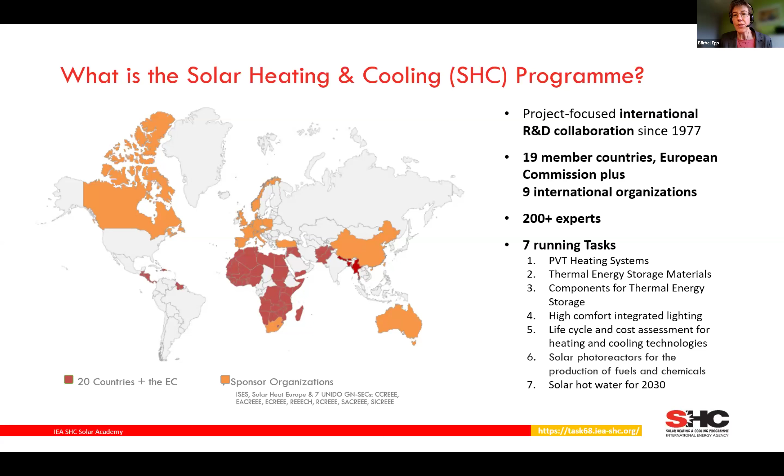There are more than 200 researchers, mainly, but also industry representatives, who join to work on different tasks - this is how we call the research platforms. They are active in different topics. Currently we have one on PVT heating systems, thermal energy storage materials and components, a lighting task, life cycle and cost assessment for heating and cooling technologies, a new one on solar photoreactors for the production of fuels and chemicals, and the one spending time with us today on solar hot water for 2030.

What is the Solar Academy? It's generally a platform which shares the findings and results from research work, but it's not only reports that we publish - we also have training materials, case studies, fact sheets, databases, and tools, which are among the deliverables of the different research platforms.

We have these webinars regularly with ISES. We have the one today, and another one planned for December 2025. They're always held on Tuesday afternoon and Thursday morning, so different regions of the world can participate. Previous webinars with their recordings and presentations are available for download under this link on our website. I want to stress that we also offer on-site training.

This must be on the request of an IEA SHC member country organization, and the previous ones were in China, Cape Verde, West Africa, United Kingdom, and South Africa.

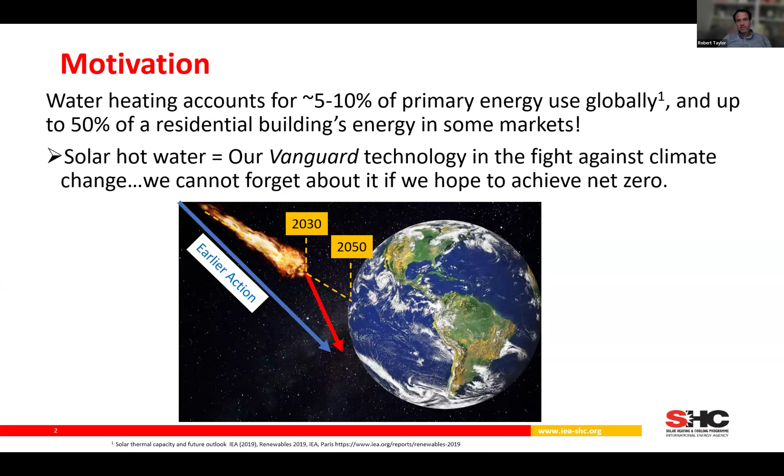As we've gone along in the task, we've realized that solar hot water has a lot of interesting applications, particularly when you start thinking about using photovoltaics to make hot water. There are interesting interactions with other things—whenever you get really high levels of photovoltaics on the grid, hot water is an interesting opportunity for storing excess PV electricity during the middle of the day and making sure it gets used rather than curtailed and turned off.

Another part of the motivation, and the reason we picked 2030 as the target deadline, is that it's pretty near term. There was an IEA report that said if we want to get to net zero by 2050, we need something like 400 million dwellings around the world with solar thermal on the rooftop. Business as usual, unfortunately, for solar thermal technologies is starting to slow down a bit. So we thought now could be a good time to have a task—this was a couple years ago—to try to fill that gap and re-accelerate solar thermal and solar PV for hot water technologies.

At the same time, there are a lot of national and international targets that had something around 2030.

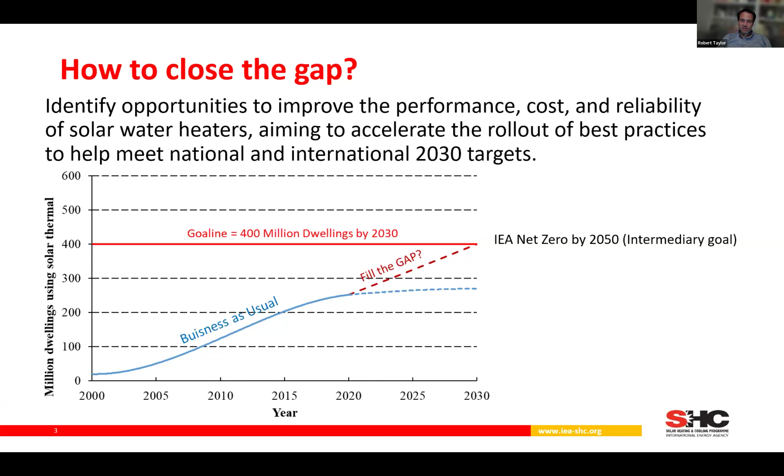So that's how we got going on this task. And basically the task focuses on two technologies. Of course, there's a few other options, but two technologies which we thought, and I still think, are quite viable for now and into the future.

One is thermosyphons, where you don't need any pumps. So you rely on the sun warming the water to kind of pump the liquid. Basically, you get the density change of warming up water, which circulates the water through the system. And right now, that's basically the dominant type of solar hot water technology in the world. Somewhere greater than 50% of systems are thermosyphons.

And also PV hot water systems, which I'm sure we'll discuss in one of the talks later, come in all shapes and sizes, but are growing very fast. An interesting thing about PV hot water is it used to be a ridiculous idea to take your $100 a watt photovoltaic system and turn it into something as simple as hot water. But now that PV is getting so cheap, in a lot of places you can install a system for much, much less than $1 per watt. It's starting to make a little bit of sense.

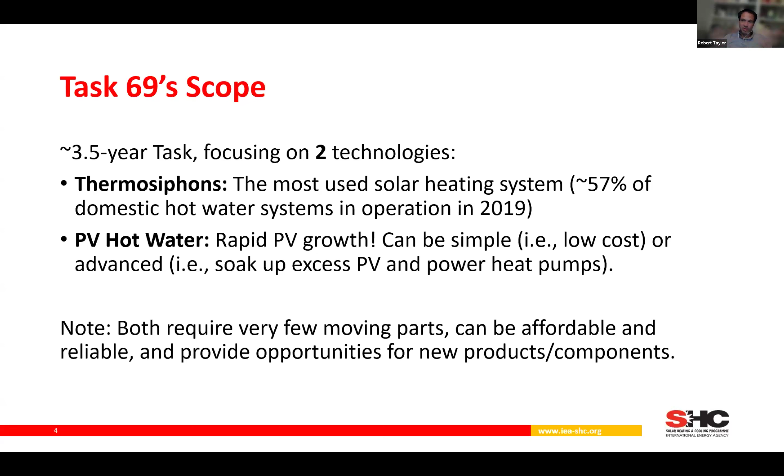And if you pair it with a heat pump or something, you can get back to similar efficiency as a thermosyphon. So both of these technologies were of big interest to us, and they have some similarities in that they don't require a lot of moving parts. They can now both be pretty affordable and reliable, and there's some interesting opportunities that might interest manufacturers to try to get some new products, components, smart systems, things like that, which I think will be discussed later as well a little bit.

And then whenever you think about where these kind of solar systems are being installed, well, we've seen a little bit of a decline in the market in China, which used to be definitely the leader. But there's still quite a bit of growth for solar hot water in sub-Saharan Africa and in other parts of Asia. People are always going to need hot water. Anyone that's tried to take a cold shower will very much appreciate having some hot water in your house. But in terms of solar technology installation, there's a few key growth areas out there, and a few of the historic ones are slowing down a bit.

In some of the other markets around the world, I'm not sure where everyone is joining from, pump systems can be more popular. And that works well, of course, if you have a reliable grid where you can use electricity for pumping the water. But places where maybe there isn't such a reliable grid or where there's a lot of rural areas, thermosyphons are a good solution.

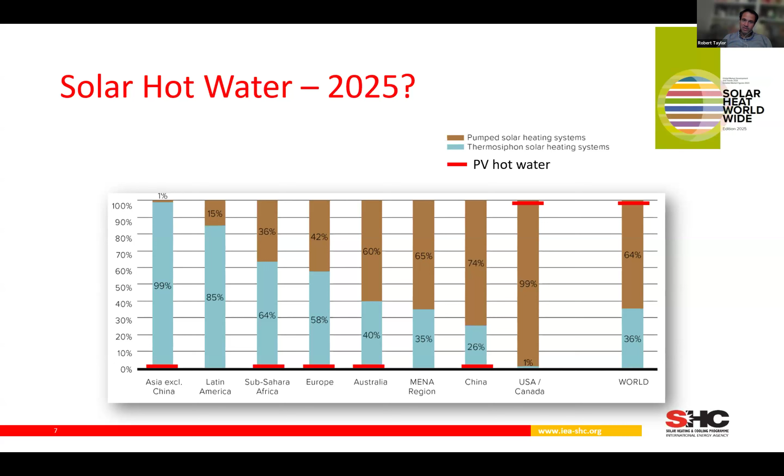And also in places where there's a lot of PV on the grid already, like where I'm coming from here in Australia, there's places where the electricity price can go negative because we have too much PV in the summertime during the middle of the day. And you can actually get paid to take electricity off the grid because there's so much solar. And so those parts of the world are starting to see some growth. Right now, it's very small, it's little bars there, but I think that's a technology that's going to grow a lot in the next few years.

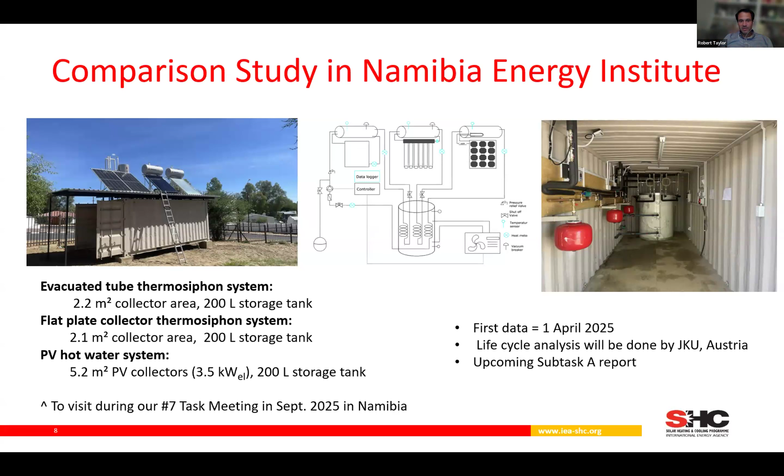So just a few other little points that were in the task that I think are worth discussing. One of the things that's ongoing, and we just recently got some live data from, is a comparison study at the Namibia Energy Institute where they're looking at a PV hot water system, a flat plate thermosyphon system, and an evacuated tube thermosyphon system, all in the same location, all with similar energy outputs, same storage tank size, and they're just now getting some live data from that. So it's kind of a nice experimental study that I was actually on the ground visiting last month in Namibia.

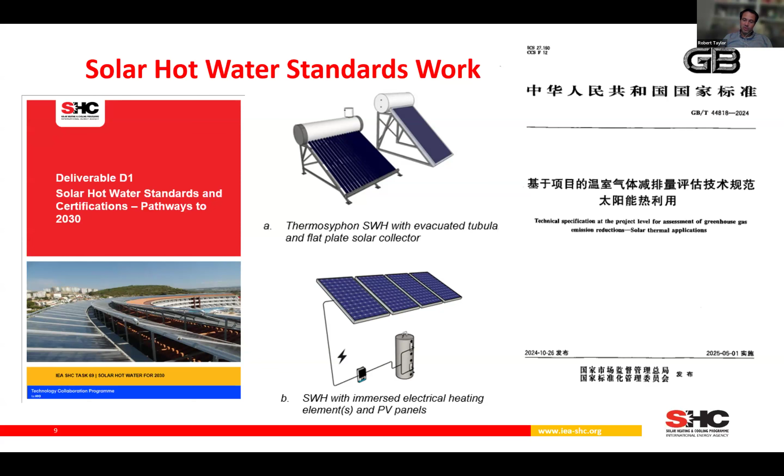We also had a bit of work on standards inside the task. So there was a new Chinese standard, which you can see there, and we had a report on different standards and certifications from around the world, which is published on the task website if anybody's interested. But there's quite a few configurations and quite a few standards around the world, and they don't always capture everything, and they don't always line up. So there's some recommendations in that report about harmonizing standards and certifications.

Also in the task, we've done a little bit of training sessions and looked at some of the needs for training. So we had some in-person trainings, and of course this Solar Academy sort of counts as a bit of training. And we had a training session in China, and we had a training session just recently on that visit to Namibia. In terms of what is needed for training, at both of those places we asked participants what they want to see more of in terms of training.

And overall, I learned a lot during this task. We have a few more months to go to get our final deliverables. But one thing that I've found to be interesting is that it really brought together a lot of people from a lot of different cultures, perspectives, different climates, different kinds of markets. And solar hot water, I think, has a role to play, maybe different technologies, different configurations, but all around the world. There's a demand for it and a way that it can be made to work, I think, economically and technically all over the world. And of course, running this task, I had opportunities to visit experts all over the world, and we had some really nice meetings all around the world.

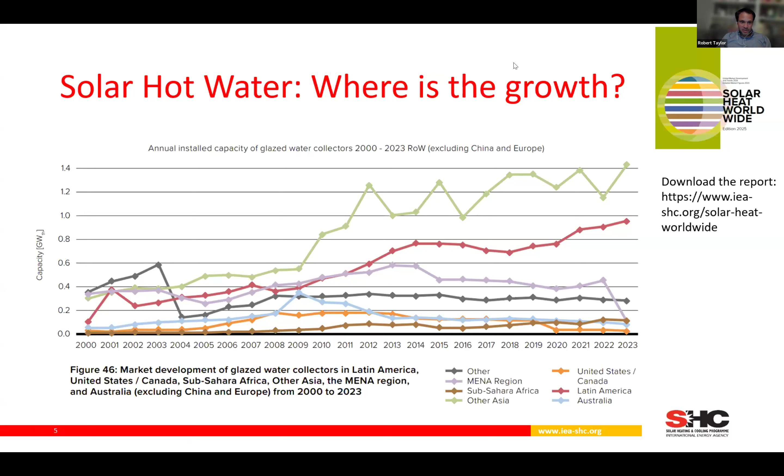Let me see. That's it, I hope. Yes. We go to the next slide. Yes.

So we have Dr. Bojia Li with us. He's also professor at the Solar Energy Application Center for the China Academy of Building Research. His research mainly focuses on solar thermal application and energy efficiency technologies in buildings. He holds a PhD in HVAC from Tianjin University, and he is contributing to the national key R&D program called Key Technologies and Demonstration on Zero Carbon Building in Solar Energy Rich Regions. He has a long title for his presentation today: greenhouse gas emission reduction testing in China for thermosyphon systems. So, Bojia, the floor is yours, and I'm looking forward to your presentation.

Thank you. And I will share my slides. Okay. Yes. So maybe there are some small mistakes.

My presentation title is greenhouse gas emission reduction testing for thermosyphon systems in China. I'm Li Bojia from the China Academy of Building Research. I joined the IEA SHC Task 69, and I'm the subtask leader of subtask B for thermosyphon systems. Today, I want to share one of the important outputs from subtask B, about emission reduction testing for thermosyphon systems in China.

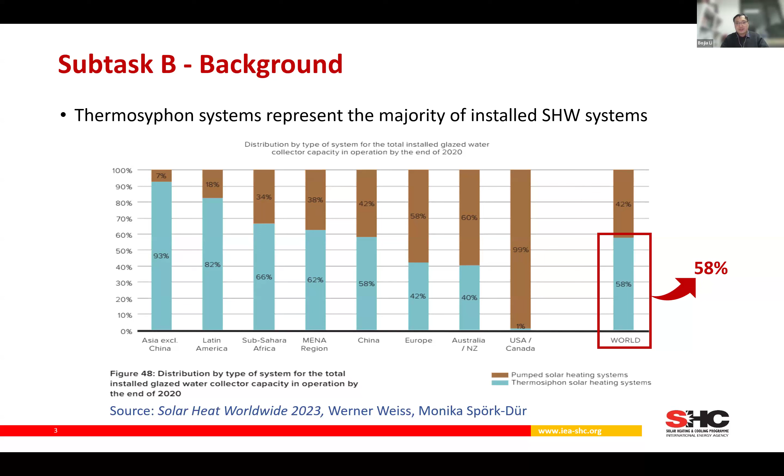There are 4 main parts of my presentation. First, subtask B is mainly focused on thermosyphon systems. Although the thermosyphon market has dropped in most markets in the whole world, they still represent the majority of installed solar hot water systems. Through this subtask, we want to promote thermosyphon systems by 3 methods. First is to investigate new systems improving convenience and performance to get better design or management technologies.

Until now, we gathered a lot of interesting innovations on thermosyphon systems, such as smart control systems, cloud maintenance systems, and new materials, all gathered in our deliverable B1. The second goal is to investigate failure modes and effects in different regions, mainly in African countries, to find ways to improve durability and reliability. The main failure modes and effects were already presented in the last Solar Academy.

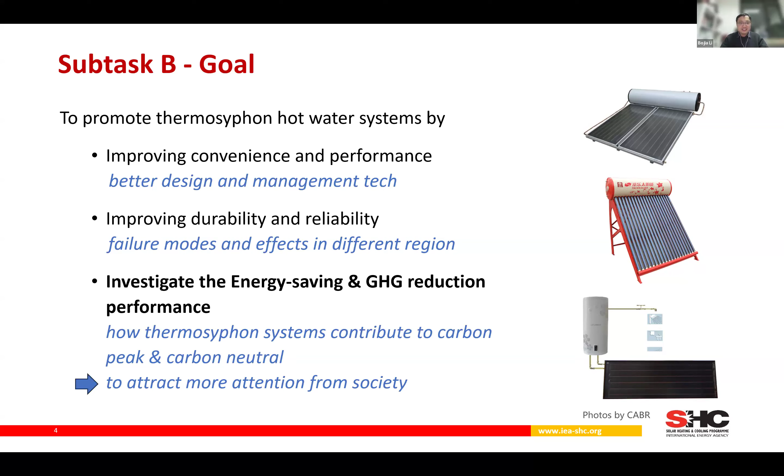So today I want to share the third one, which is to investigate the energy saving and emission reduction performance of thermosyphon systems. We want to tell the public how thermosyphon systems contribute to the carbon peak and carbon neutral goal, and attract more attention from society to show we are making a big contribution to carbon emission reduction. That's our initial motivation for this part of research.

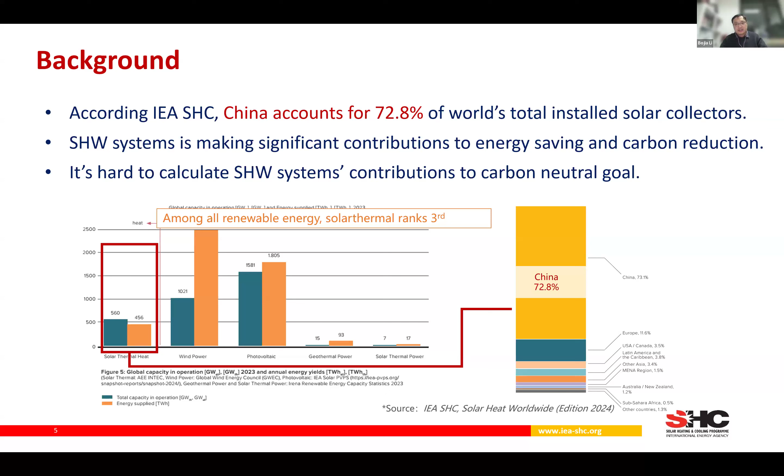The background is China accounts for about 73% of the world's total installed solar collectors, and solar hot water systems are making a significant contribution to energy saving and carbon reduction in China. But it's very hard to calculate their contribution to the carbon neutral goal, because China lacks an emission reduction assessment method for solar hot water systems. There are China's own certified emission reduction methods, but only 4 methods published.

One is about solar thermal power generation. Others are about carbon sinks for forests, grid-connected offshore wind power generation, and mangrove forest construction. None of them are relevant to solar hot water systems. For international methods, there is the Clean Development Mechanism, mainly developed by the United Nations, with one method for solar water heating systems including 3 ways: system simulation, system metering, and stipulated energy saving. They give a constant annual solar yield of about 450 kilowatt hours per square meter of collectors.

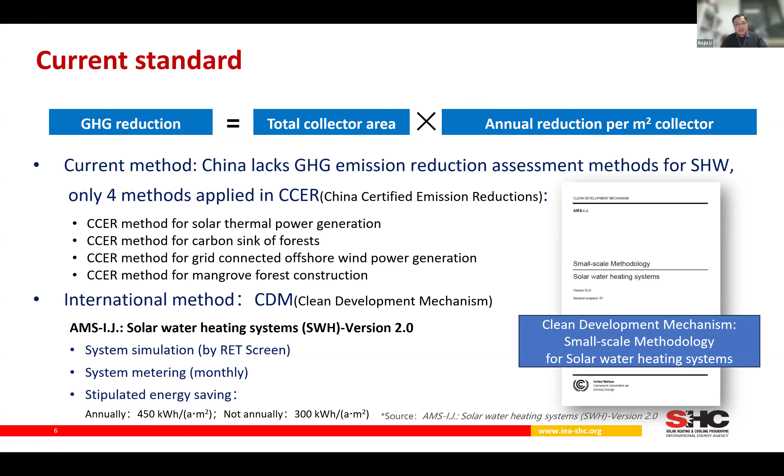We think this method is also not quite suitable for the Chinese situation, because there are a lot of differences between China and Europe and the US in hot water systems, and that may cause differences in emission reduction. For example, China has a lot of different cities.

They have a lot of very different solar resources. For example, in Beijing, the annual solar irradiation is about 1,000 to 1,500 kilowatt hours per square meter. But in Tibet, there may be more than 2,000 or even 3,000 kilowatt hours per square meter of solar irradiation. So the solar resource is very different in different places. That means you will get very different emission reduction with the same solar thermosyphon systems.

Another is the system type. In China, this compact system takes the majority of the thermosyphon systems. It uses evacuated tubes and a water tank, integrated together to provide hot water. And the hot water demand is very different because there are a lot of high-rise apartment buildings in China, and the government used to force buildings to install solar hot water systems. So you can see a lot of this type, the flat plate balcony system, installed in high-rise apartment buildings. Therefore, we think other countries' experience maybe is not quite suitable for emission reduction in China.

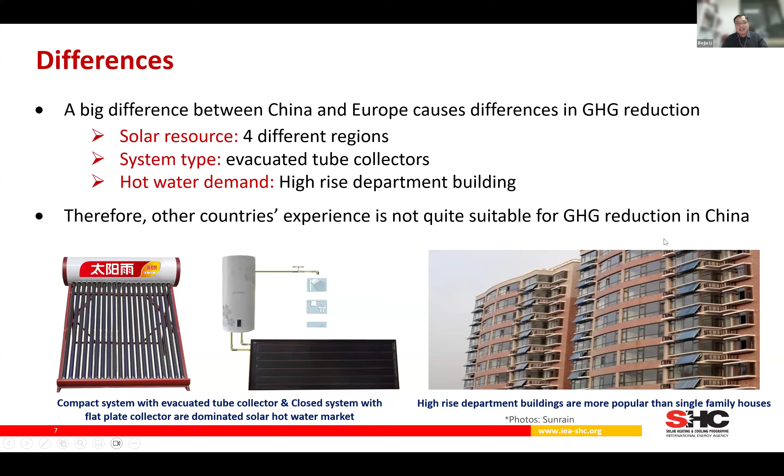So we started our research, and we want to build a method to assess the carbon emission reduction for solar hot water systems and tell the public how much carbon emission reduction the solar hot water system could provide for society. To ensure the reliability of the method, the research includes four parts. First, we generate a main procedure to evaluate the emission reduction performance for solar hot water systems.

We already know ISO 9459 Part 2 gives the testing method and long-term calculation methods for solar hot water systems' solar yield. For example, we can calculate how much solar yield one solar thermosyphon system could get through one year. Then we could convert that into carbon reduction with a carbon factor. I will talk about it later.

And then we make long-term modeling. We model annual energy saving and carbon reduction by daily calculation. This modeling procedure mainly follows the way used in ISO 9459 Part 2, but we make a little adjustment to make it suitable for the compact system I just mentioned, the most popular system in China. And then we did long-term testing to verify the model with operation data.

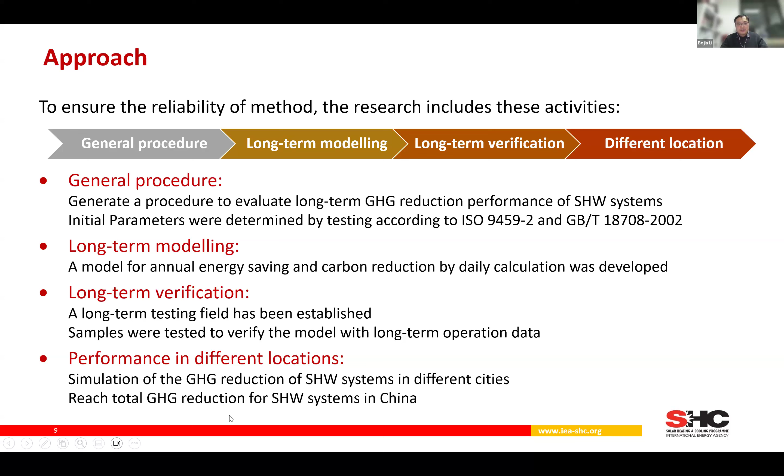And then we do simulations for solar hot water systems in different cities in China, because China has a lot of different cities with quite different solar resources. And then we reach the total emission reduction for solar hot water systems in China. The general procedure is mainly three steps.

First, individual samples of solar thermosyphon systems should be tested in the laboratory according to ISO 9459 Part 2 and the Chinese national standard 18708, to get the main characteristics of the system, mainly the solar yield, heat losses and the drain water temperature curve. There is a little difference, as I just said, for the compact system in China.

It's an open loop system. So when you drain out the water from the tank, the temperature remains the same, as no cold water will be added. And so you could only drain out about one times the tank volume of water during this step. So we took these two standards. This is for the compact systems. This is for other types of system.

And then we calculate annual energy output and saving with the software, because we must get the annual energy output through daily calculation. We calculate every day's solar yield and every day's heat losses, and we give a daily water use curve to simulate the water usage. The method is very similar to ISO 9459 Part 2, but you have to calculate 365 times a year. So we developed a small software to make it easier.

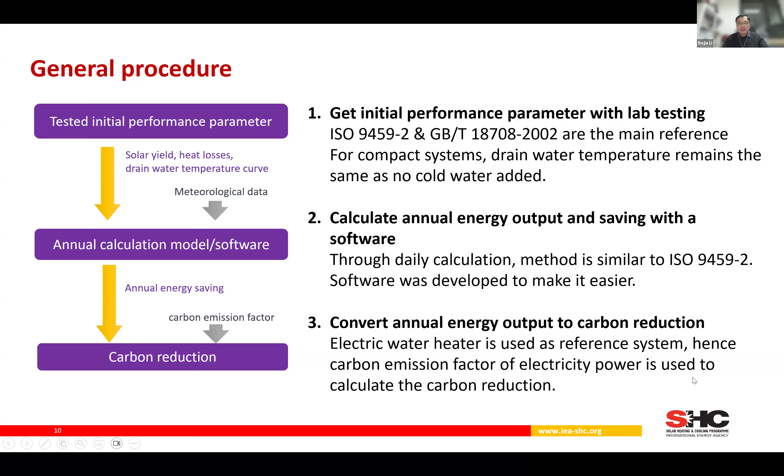And then when you get the annual energy saving, annual solar yield, you could convert annual energy output to carbon reduction. At this stage in the research we use an electric water heater and a gas boiler as reference systems. But for the testing we use an electric water heater as the reference system, and then the carbon emission factor of electric power is used to calculate the carbon reduction. I will talk about it later in detail.

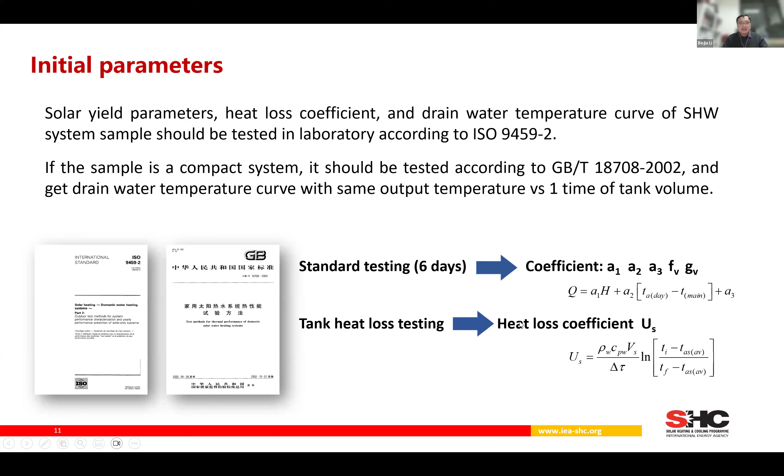For the initial parameters, as I just said, these key parameters could be tested in the laboratory according to ISO 9459 and the Chinese national standard 18708. And then you can get these characteristics and input them into our testing model. We made a small calculation software, and you input that.

The software will calculate the whole annual solar yield and carbon reduction automatically. This is the main calculation procedure. I think it depends on the time. I don't have enough time to introduce in detail, but maybe you could look at that later.

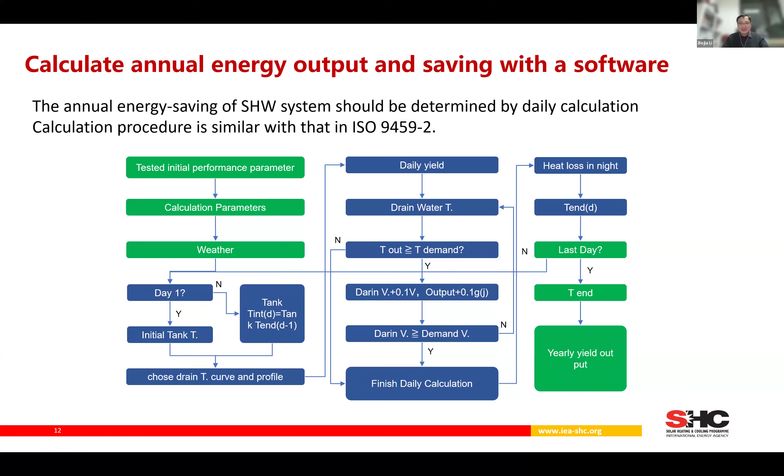And for the convert to carbon reduction stage, as I just told, the emission reduction of solar hot water systems could be calculated with the following equation. It's generally about the baseline emission and the project emission, and if you have the testing or calculation solar yield per year, you could multiply by the baseline carbon factor and then divide by the baseline efficiency. The efficiency means the electric water heater or gas boiler,

the energy efficiency. According to Chinese national standards, the energy efficiency for an electric water heater must be no less than 0.95, and for the gas-fired boiler must be no less than 0.86. And for the carbon factor for electricity, we usually use 0.5 kilogram carbon dioxide per kilowatt hour. Our government announces the electricity carbon factor every year, and we could see last year is about 0.56, and the year before last year is about 0.58, and now it's declining every year.

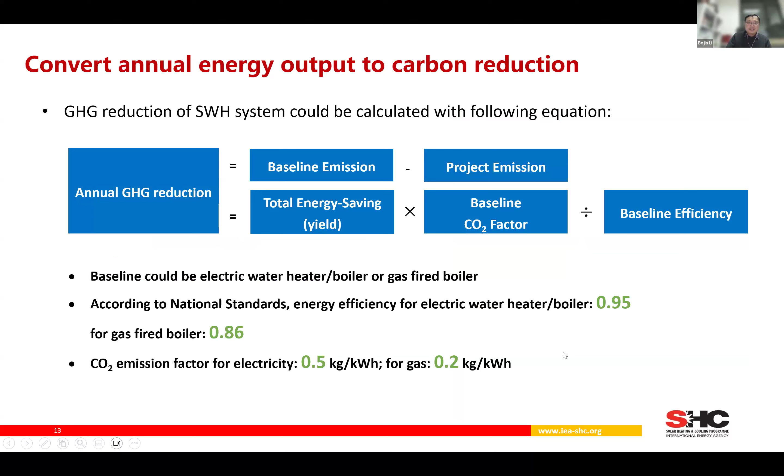We did a prediction for the future 5 years carbon factor, and the average one is about 0.5 kilogram carbon dioxide per kilowatt hour. Usually we use this figure to calculate the carbon emission in the Chinese national standard. And for the gas, maybe this is more fixed, and it's about 0.2 kilogram carbon dioxide per kilowatt hour heat. Okay, that's all the assessment method part.

And then to verify the calculation model and the calculation procedure, we built a carbon reduction testing field in Jiangsu province with the help of Solareast company. And this is also a part of the output from our subtask B. And this is a view of the testing field. There are 25 types of thermal systems installed for long-term testing, including the solar hot water systems, and also PV water heaters, PVT systems and some heat pump systems. But we only use the solar hot water systems for verification.

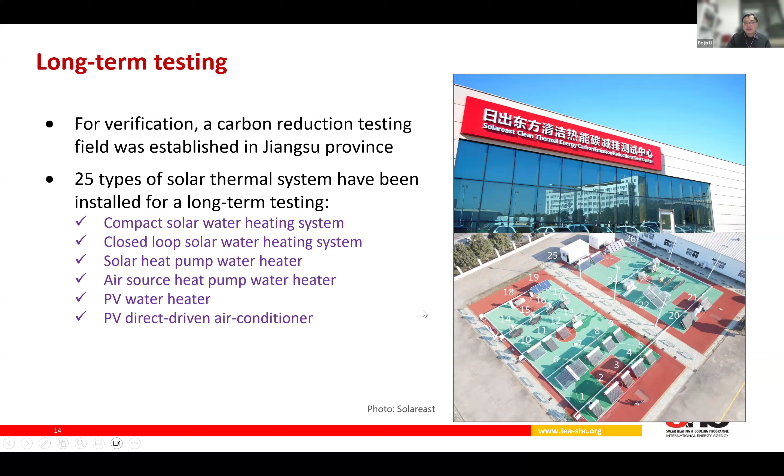We mainly use these two kinds of system. One is the compact system or open loop system, which is the most popular system in China. 10 samples have been tested, and the average daily energy saving is about 2 to 4.7 million joules per square meter. And the average daily emission reduction is about 0.33 to 0.75.

And this type is the most popular system in Chinese high-rise apartment buildings, the balcony system. This type of system is a pressured system and a closed loop system. This is a tank. This is a plate collector. Usually this will be installed outside the balcony, with a pipe between the tank and the collector connecting them to transfer the heating fluid.

And about five systems have been tested, and the average daily energy saving is about 0.8 to 2.3, and the emission reduction is about 0.14 to 0.5. You could see the pressured system or balcony system is less than the compact system. That is because it is mainly designed for balconies of high-rise buildings, and the slope of the collector is not quite as good as the compact system.

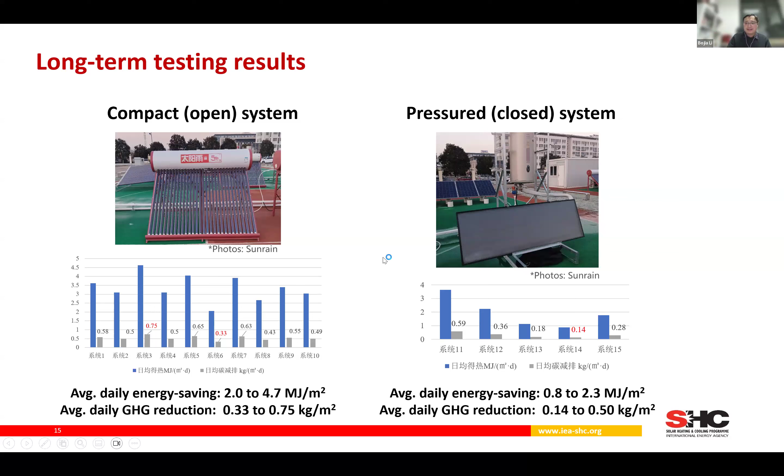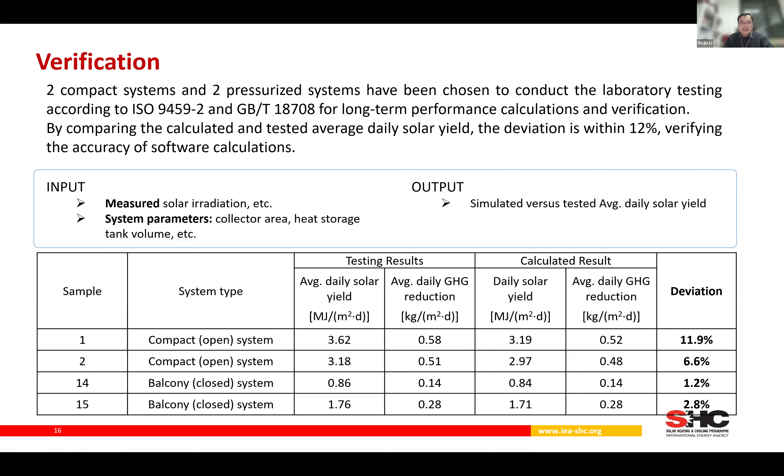And then for the verification, we input measured solar irradiation weather data and system parameters to the software we developed, and we compared the calculated solar yield and the tested solar yield, and we could see the deviation is within 12%. We think our method is accurate enough to evaluate individual thermosyphon systems' emission reduction.

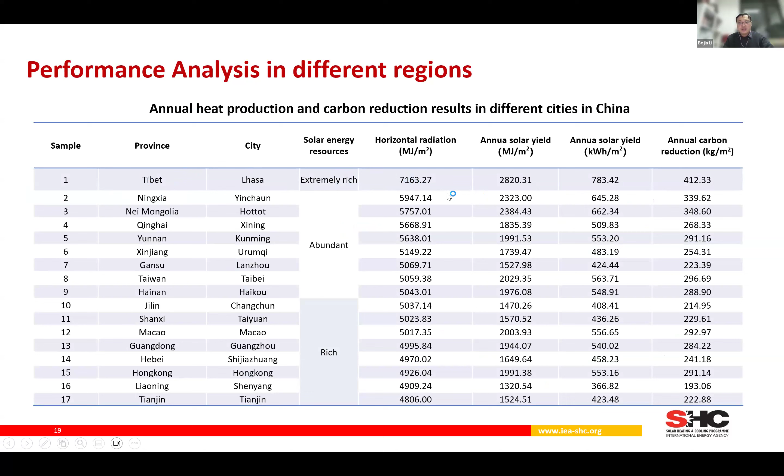The extremely rich resources are more than 7,000 million joules per square meter per year. And the worst solar energy resource is Chongqing. They have only about 3,000 million joules per square meter per year, and it's half of Lhasa in Tibet.

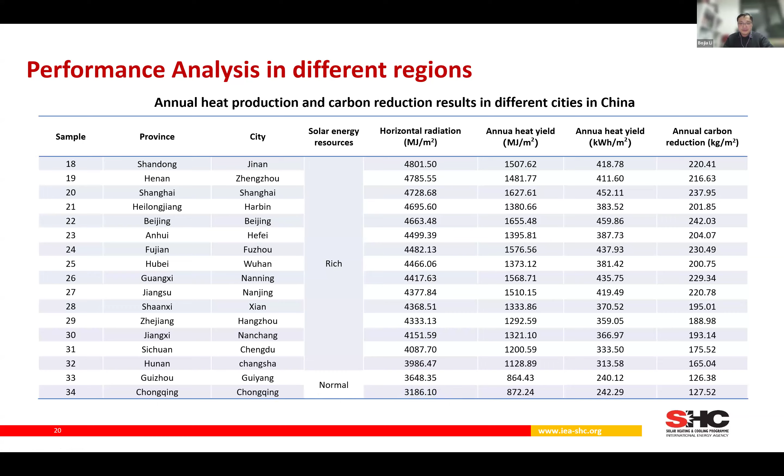And when we get the solar yield and emission reduction for each city or each region, we think this city could, on behalf of this province, and to get an average figure for the whole country, we use this figure weighted according to the population of each province. That is, we think in China almost every family has

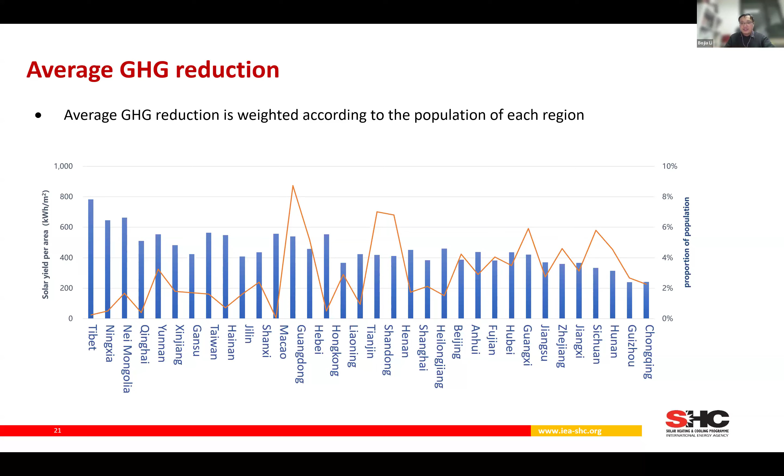thermosyphon systems, so maybe the city with more people will have more thermosyphon systems. That will reflect how many systems have been installed, and then we get the final figure: the average solar yield for thermosyphon systems in China is about

420 kilowatt hours per square meter, maybe less than the figure in the CDM method. And the average emission reduction is about 97 to 220, because this figure differs depending on whether it's compared with a gas boiler or with electricity as the reference system, because in China electricity has a larger carbon factor compared with gas boiler.

And then if we take the solar heat worldwide figure into calculation, the total annual emission reduction is about 50 to 120 million tons of carbon dioxide in China. So the Chinese solar thermal systems now contribute about

1% of China's total emissions now, and we think this could tell society that our solar thermal is contributing a lot to the carbon neutral goals. Okay, and all the methods I told you about now support the Chinese national standard for carbon emission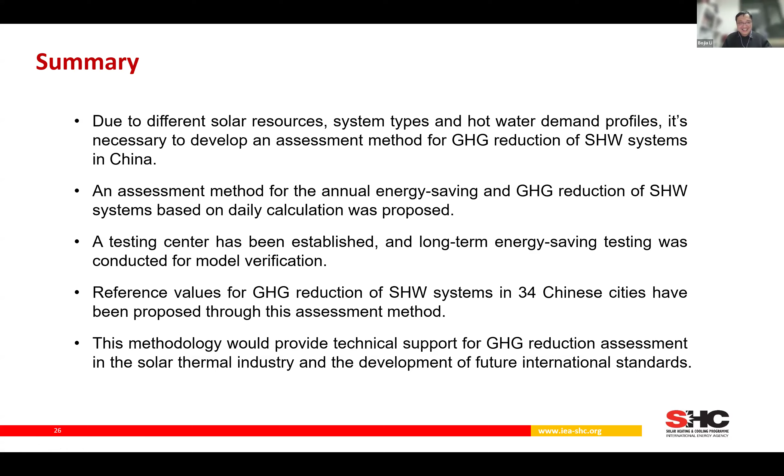Sorry for the time. Yes, that's fine. Sorry, thank you very much for the interesting talk. If you invite professors, you get long speeches, that's clear, but it was very interesting insight into what China really contributes. And I think it's important to really figure out this contribution, as you are the largest solar thermal market worldwide.

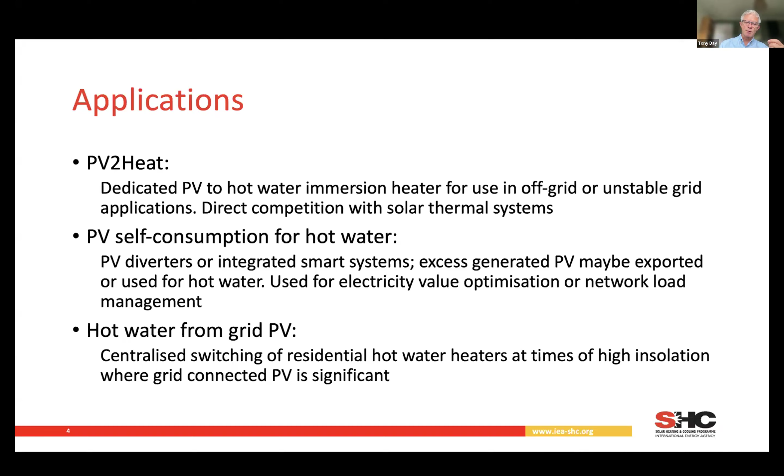And then finally, this idea of hot water from grid PV. We're now seeing a large growth in some countries of grid-connected PV systems, and I'll talk about this a little bit later on. There are options and possibilities for centralized switching of residential water heaters, so you can actually divert electricity into residential hot water tanks. So you've actually got a large thermal battery that you can start playing with for grid management, and we'll see why that's important.

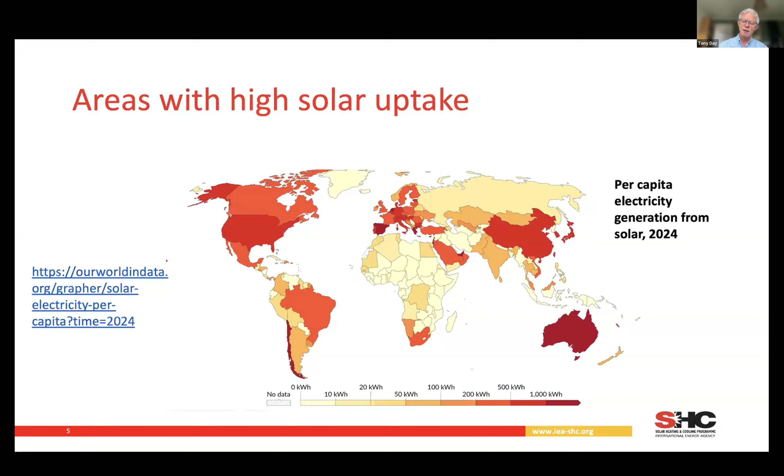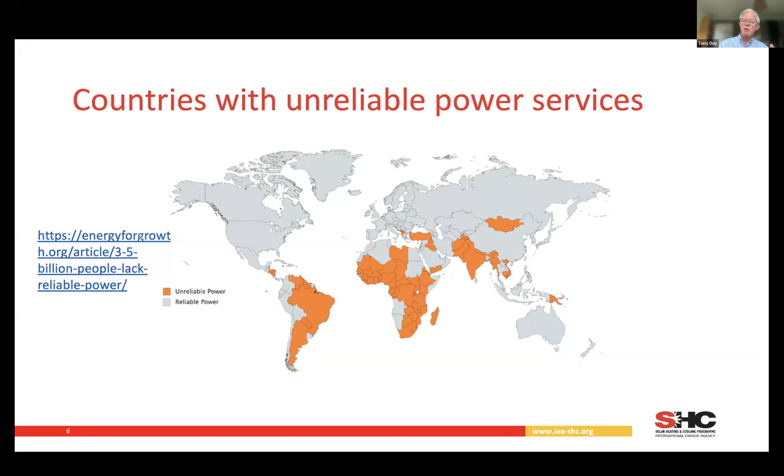But then there are other circumstances, a number of countries around the world where grid electricity is perhaps less reliable, less stable, and it makes less sense to have an interconnected grid system with your PV rooftop. You may have much more autonomous systems, in which case you want to heat your hot water directly, or you might want to heat hot water and domestic appliances, in which case you need to go for smarter systems. In some cases, these countries overlap those two different types of markets, so it's a complex situation of where PV can work.

So we'll get a brief look at those technologies. PV to heat.

This technology is still developing because you want the most efficient system, so for example having maximum power point tracking, that's necessary to properly match the variable output of the PV depending on the solar radiation available, and match that to the optimum requirement of the heater elements. So these systems need to be a little bit smarter than just having an inverter, or even direct current into the resistance heating.

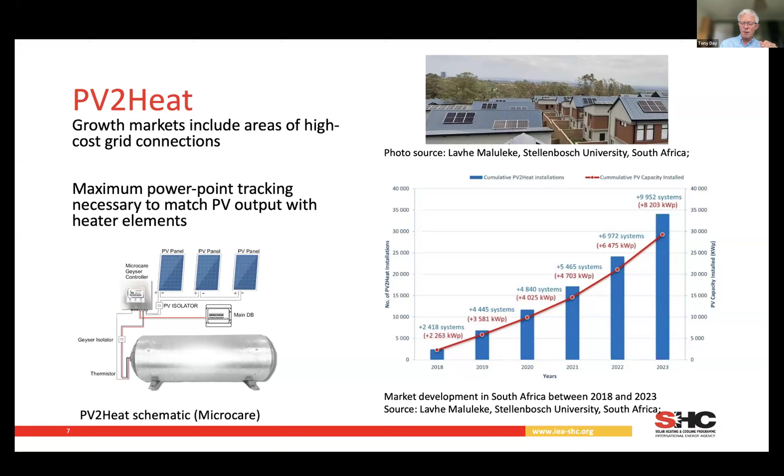So the other option here is where the electricity markets are probably more stable grids, more mature electricity grids. So, for example, in the UK, we may have hot water storage, grid connected, PV on the roof, and we decide whether we're going to use the electricity from that PV to run our appliances, to export to the grid, or if we have surplus, we can divert that to the hot water storage tank.

There is a big resistance in countries such as the UK to do that, where we typically heat our hot water from natural gas systems, and the idea is that gas is so much cheaper than electricity. So you would need an additional system if you're going to have PV diverters to heat the hot water tank. Well, it's not such a problem, because all of those gas water tanks will generally have a backup electric immersion heater. So it's actually very easy to fit these PV diverters into existing systems, and right across Europe that's where the market is, and also in Australia, that's where the market is for these kind of technologies.

This example that I put here of Mixergy, the company Mixergy, in fact goes one step further, and they have a smart hot water tank that can actually manage the state of thermal charge of the tank. So you can actually start to optimize whether your electricity goes into the tank, to the grid, or into the house, and how much hot water you're likely to need in the coming hours, and you can start to have much smarter control. So that's a really interesting adaptation of these technologies, making them much more attractive where you have growth of PV systems.

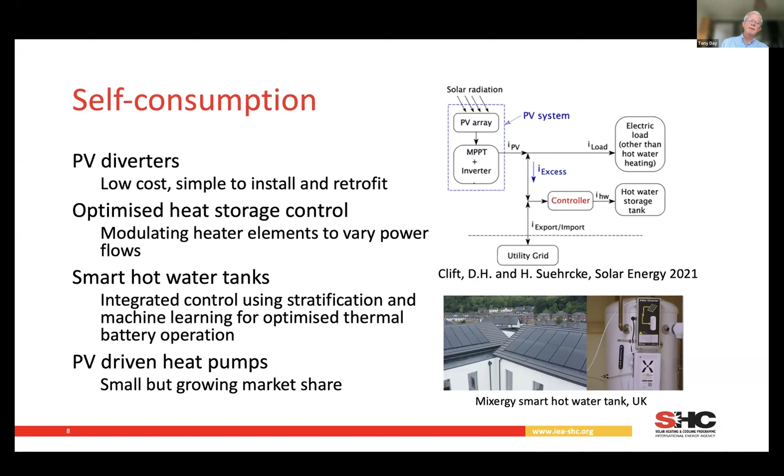We can have the PV output drive heat pumps, and in Germany there is growth in that market. We haven't seen it, for example, in the UK. It is more sophisticated to do that, and generally you need a good amount of solar radiation year round to enable that to become much more cost effective. In the UK and Ireland, where it's cloudy most of the winter, that's not a very effective solution necessarily.

And then we come to grid PV to heat. This is a really interesting issue that is becoming apparent to a number of countries right now. So Australia, where there is a high amount of PV rooftop market penetration, there is also a large amount of solar grid PV as well. And these things can be in competition, because the solar rooftops are taking load, taking business away from the centralized grid. And this is also beginning to happen in the UK.

So these technologies actually start to require a little bit more interaction between the grid and the domestic end user. As I say, in Australia this is particularly an issue. Robert mentioned a bit earlier that at times the price of electricity on the grid can go negative when there's too much solar on the system. So there are trials there to say, well, can we actually use this large thermal storage battery and control that in a smart way, centrally?

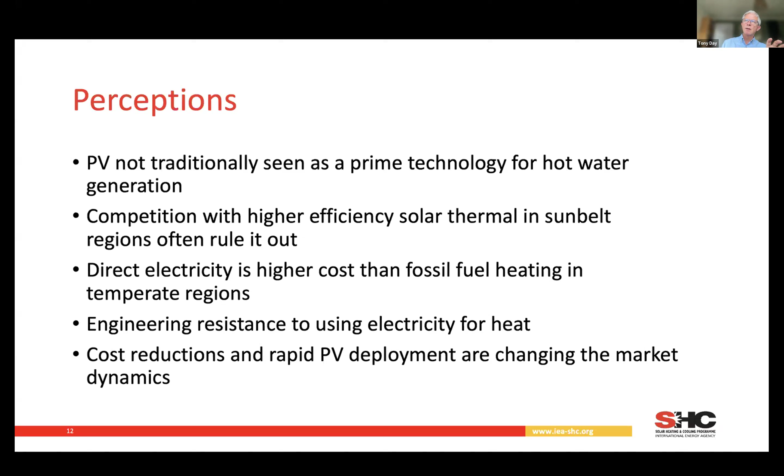So things are moving. And one of the things that we're really interested in is how the policy and regulation space needs to keep up with the pace of change of technology. As I said earlier on, we're now undertaking a piece of work to understand what that policy landscape looks like. It's actually very difficult to identify specific PV to hot water regulation, but in the UK, buried in the new forthcoming building regulations, for example, it will be very difficult to meet those regulations if you don't put in systems that have zero carbon hot water heating strategies. And in the UK, that will probably have to be PV. So these technologies may, in some markets, actually become almost mandatory.

So currently the evidence is limited around what policy instruments and regulatory instruments there are out there. But there are a number of them, as I say, buried within renewable energy mandates, and that needs to be brought out, and for policymakers to understand the opportunities. So we see PV hot water systems are seeing significant growth. The application and uptake depend on climate, the electricity system maturity, and the PV market penetration rates around the world. So PV hot water can be lower cost than solar thermal, because of that reduction in hardware price.

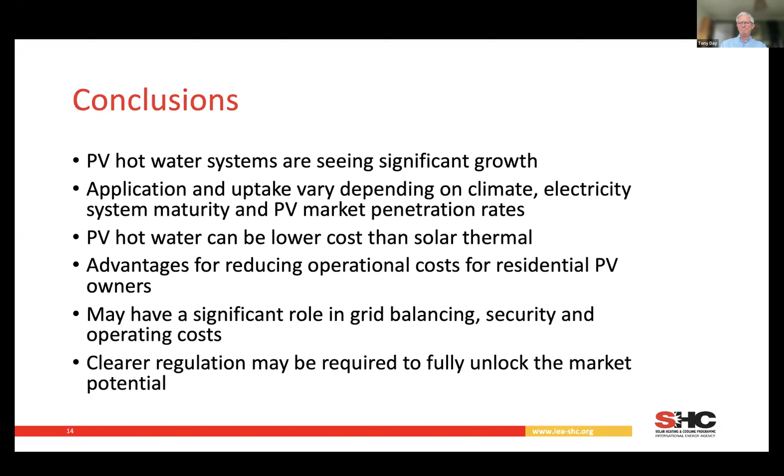Excellent, Tony. This was a complete shift away from thermosyphon traditional markets to modern smart PV to heat markets in the UK. So thank you all together, and bring up your cameras now. We start with the Q&A, and we have some really challenging questions. And I would like to start with the more general ones.

And this was one of the latest ones, asking whether you have ever done a calculation on the carbon footprint of PV and solar thermal. Was there anything done in Task 69?

Shall I start? Yeah, sure.

Well, not directly for PV hot water systems, but I do think that this area, because it's fast moving, may well be a need for future research to actually understand what those full life cycle carbon issues are. But not yet done. Okay. So can I add one thing?

Yes, sure. So of course, there's quite a range of the PV hot water technologies. I think the one where you just have PV, a little bit of electronics, a maximum power point tracker kind of thing, and then direct to a resistance heater, that's pretty low carbon emissions. I mean, that's got to be competitive or better than a thermosyphon system.